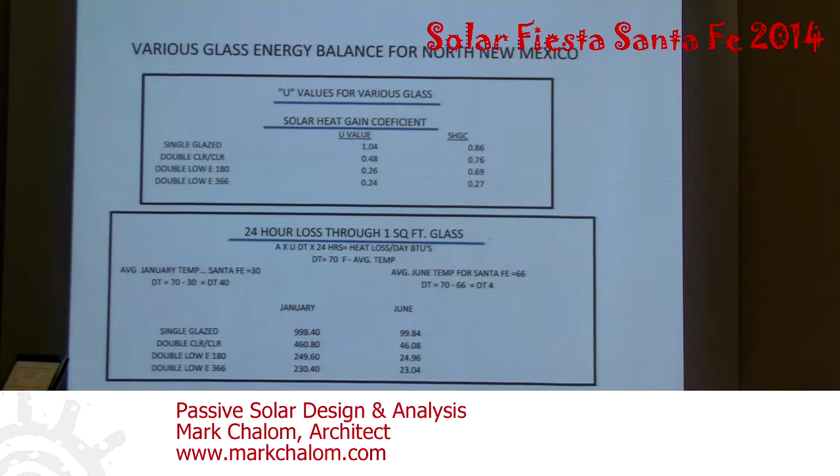A lot of people are used to seeing all kinds of pretty pictures. Well, I left those out this time, and I'm just going to talk numbers, because I think it's really important for people to understand how passive solar works and the potentials of passive solar. So let's start with a piece of glass, 1 square foot of glass, and what are its characteristics.

You have various values that you will get from the glass manufacturer, giving you the characteristics of the glass: the U value, which is the insulating value of the glass, and then your solar heat gain coefficient, which is the amount of energy that comes through the glass as a percent of the energy that strikes the glass.

So with this, I'm going to be answering the question, what kind of glass do I use for my house? I get this all the time. I'm sure a lot of you get that. And it's not a quick answer where you could just say, use this. You need to know the function of the glass, the orientation of that glass, and what you want that glass to do. So you have to do what we call an energy balance.

And part of that is comparing the gain that you get from the glass to the loss that you get through the glass. And on a 24-hour period, we used a very simple number. Here it is. Area times U, which is the insulating value, times the delta T, times 24 hours will give you the heat loss in a day in BTUs.

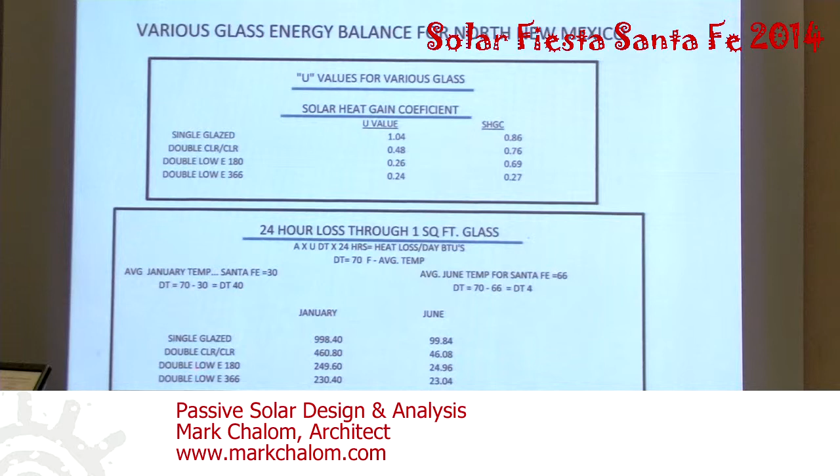So for 1 square foot of glass, understanding the loss and understanding the U value of the glass, different types of glass will have different characteristics or different loss. And this is the loss off of single glazing, double clear over clear, and 2 different types of low E, the 180 and the 366.

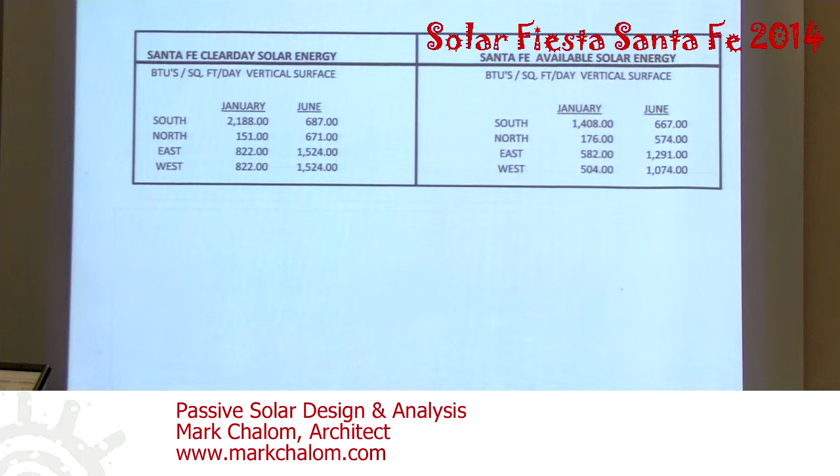Now, we also have gain on that glass, okay? We looked at the different losses. We also have different gains, which play into the percent possible sunshine, because we have clear day solar energy. This is in a perfect world on a clear January day. This is the amount of energy that is going to strike that glass on a clear January day. So different orientations, south, north, east, and west, you have different gains. And look at the gains that you get in January.

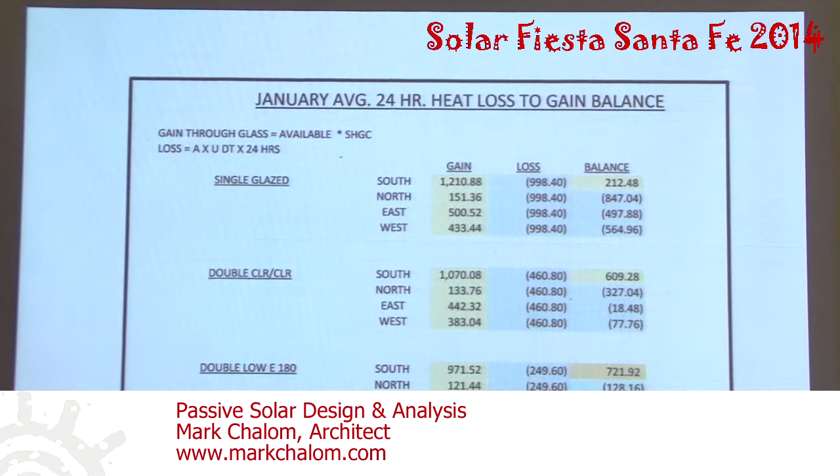But that's not what's coming in through the house. You have to degrade that number because it's not a perfect sunny day every day in January. So if you want to look at a January average, you've got to look at the average amount of gain that you get on that surface. So it degrades from 2,000 down to about 1,400, and again will drop with various types of glass or different orientations. So we now take 2188, drop it down to 1408, and then we have to run it through the solar heat gain coefficient number to find out how much energy you actually get down into the space.

So the gain has been degraded, as you see. Now we're down to 1,200 BTUs gain coming through the glass. We looked at the loss, losing 998 BTUs, so you end up with a plus here of 212 BTUs. 40 years ago, that looked pretty good to us, you know, because everybody had single glazing. Then we came out with double glazing, and we got all excited. Look at that. Almost 3 times as much energy that we're able to harvest through double glazing.

And if you take that down to low E, there are different types of low E. Low E is not always the same. Look at the difference in gain that you will get from 180 to 366. And if you look at the losses, you have more losses here than you do here. But if you look at the net difference, this low E looks a lot better than this low E. In fact, this low E has less net gain than single glazing.

So when somebody says, use low E on your south wall, your response is, what kind of low E? There's a big difference. Also look at your east and west sides. They don't gain as much, your north. And again, this is just January average. Let's look at June, because that plays into it too. What you might gain in the winter, you might lose in the summertime because the house gets too hot. So again, you have various gains and you have various losses depending on the characteristics of the glass and the orientation that that glass is facing.

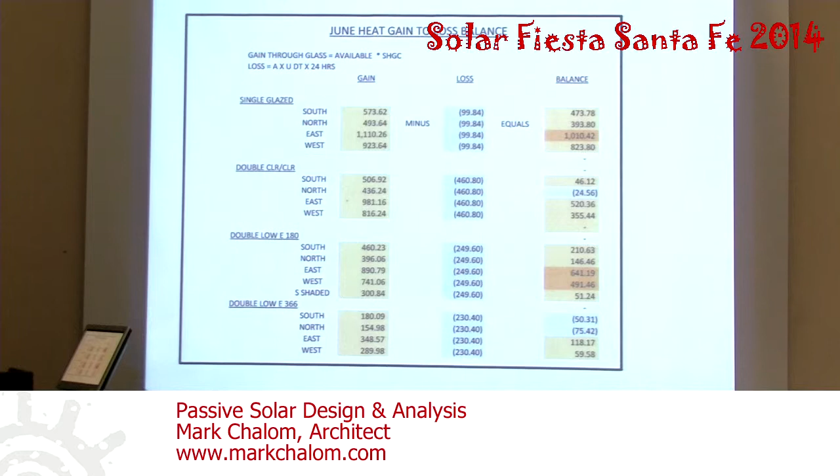So when you do the net balance, you can see that you may have a little bit of a problem here with the 180 if you have it on your east and west orientations. So you may want to go to a different low E for those orientations, or even just save yourself a little money and go up to the clear over clear. So that might help you answer, what kind of window do I want on my home?

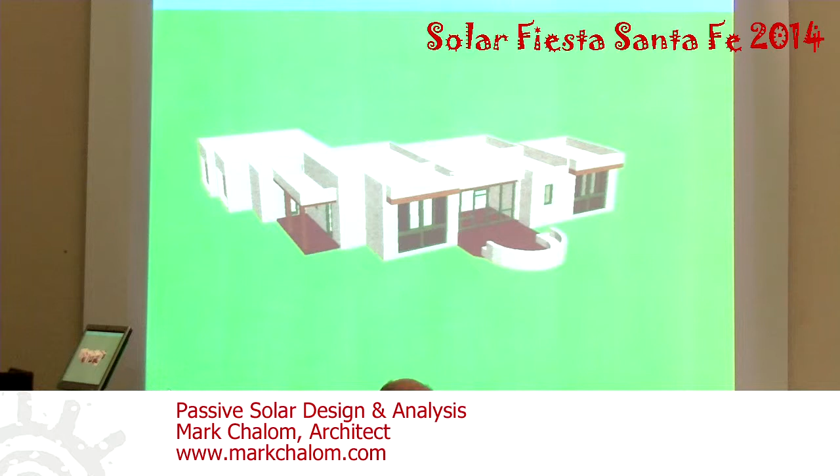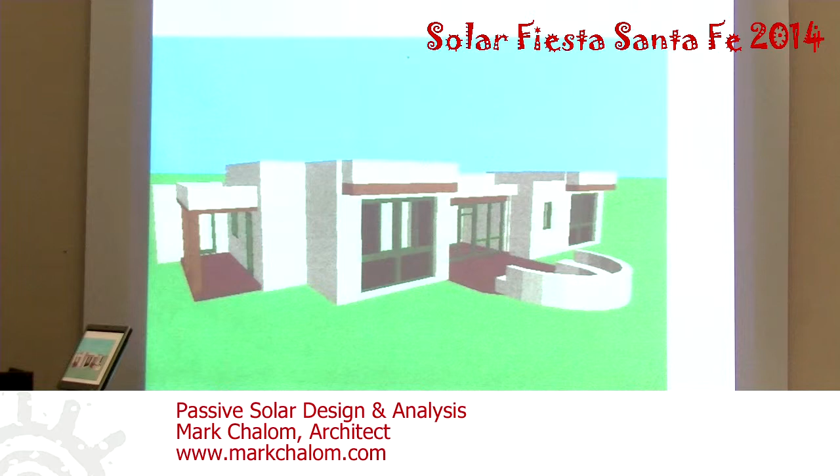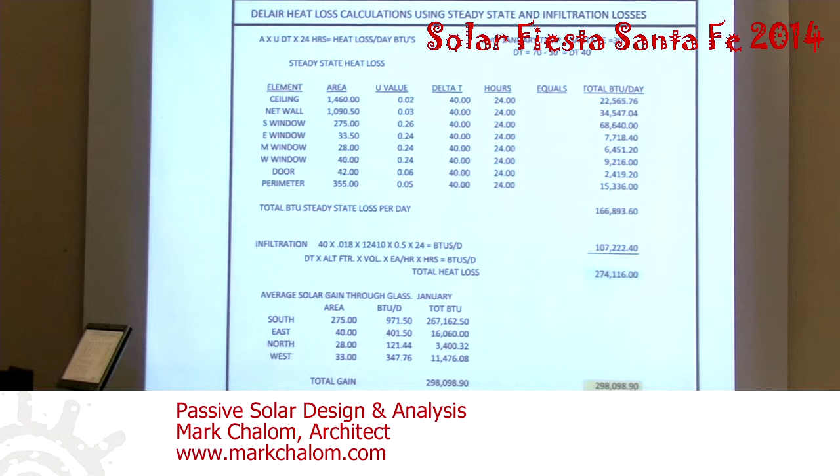This is my basic ASHRAE heat loss, heat gain calculations. This is not what I would use if I was actually engineering a passive solar home. I'd go to more sophisticated programs, but I did this because it's very simple to show you the energy balance of the home. So what we did is, again, we used that same formula, area times your U times your delta T, times 24 hours is your heat loss for the day. Again, using a 40-degree delta T. Here's my areas, my U values, my delta T's, my hours, boom, total it up. There's my steady state heat loss in BTUs for a 24-hour period.

That's not all the loss. That's just your conductive losses through the skins of the building. We also have an infiltration loss, which is the amount of energy you lose through cracks around your doors and windows, air moving across the house. You lose greatly. We're now building houses where we're getting numbers down to about a half an air exchange per hour. When Bristol and I first started cranking numbers like that, we'd fight whether it's 3 air exchanges per hour, or maybe if we built the house good, we'd call it 2 air exchanges per hour. But it was a big guess number and always debatable.

But you come up with a number, and then you add your steady state to your infiltration losses, and you come up with a total heat loss of the home. And if you see that, we're over 274,000 BTUs on a day. You can convert that by dividing it by 3,414 BTUs per kilowatt times 13 cents a kilowatt, and it'll give you about, I think it was $8 to $11 per day in there.

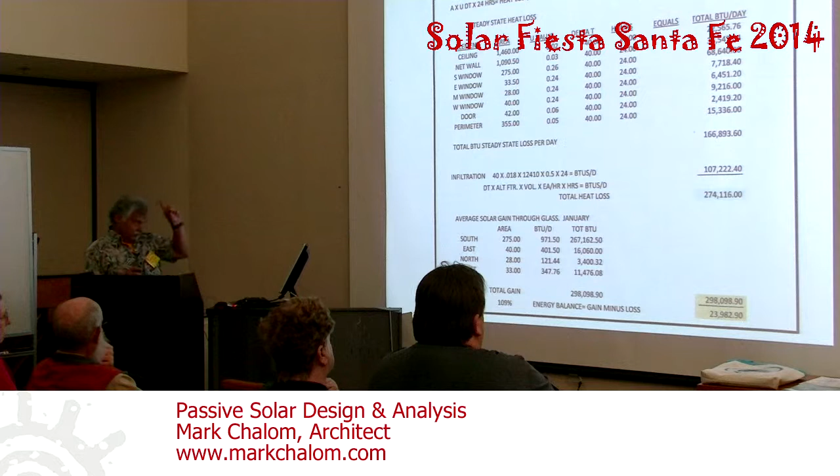No, I'll take that back. The difference will be that. I'll just keep those numbers in mind. So we have this loss of 274. So let's go ahead and take our orientations of our solar glass, 275 square feet of glass on the south, times the BTU gains that we get on an average January day through multiplying your clear day through your percent possible sunshine times your solar heat gain coefficient.

We degrade down to these numbers in BTUs per day, but you multiply it out and you get a certain amount of gain, total gain, for the house coming through your glass. So if you balance your glass gain to your loss, you end up with, in this design, a net plus of about 24,000 BTUs, which comes up to about 109% of the loss is covered by the gain. So this is a pretty good passive solar home. And it's just basically showing us the potentials that we can get through passive solar gain.

Okay, so let's take the same house and bring it down. See, I had insulating values that I use in my designs. And now we are under the new International Energy Conservation Code 2009, which has been accepted by the state of New Mexico construction industries as a standard you need to comply with to get a building permit to build your home. They want to make sure that your home is energy efficient enough. So I said, okay, let's degrade my design down to the standards of the International Energy Code,

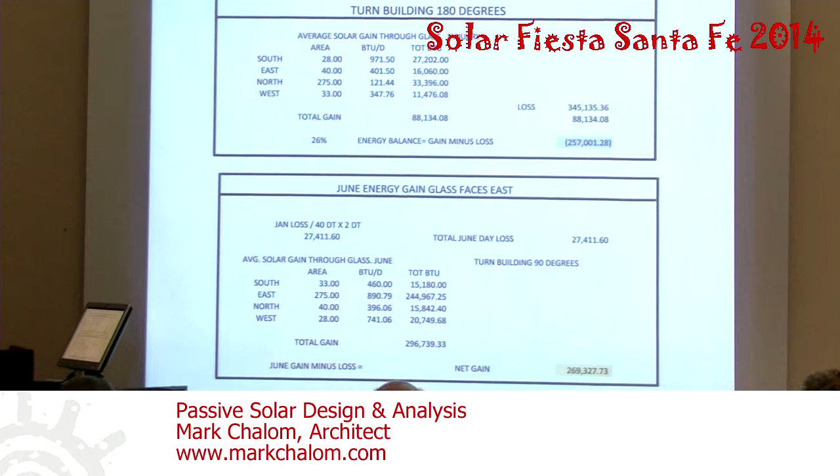But let's start playing games. Let's take this same house and turn it 180 degrees so the 275 square feet of glass is now facing the north. And we have various gains coming in. We have 28 square feet now, instead of the north, it's to the south, and 275 square feet of south is now to the north. We come up with a gain of about 88,000 BTUs compared to our loss that we had to code of 345. We end up 257,000 BTUs short of meeting our goal for a passive solar home on an average January day. So with all the glass around the house, we're taking in about 26% of the loss in solar gain.

I also wanted to take a look at June, and as I said, you've got to watch your glass in the summertime, because what you gain in the winter you might lose in the summer. And I said, okay, let's turn this house so the 275 faces east. And I don't know if you remember my chart. If you do, you're better than I. But when you look at percent of possible sunshine, you have more gain on the east than you will on the west. These numbers here.

And why is that? Because usually we have storms and stuff like that more in the afternoons than we do in the mornings in June. So you have more gain on the east than you would on the west. That's these two numbers here. So watch your east as much as you watch that western sun.

How did I go back here on this? This one? Slide. Oh, previous. Okay. Go to slide. Previous. Well, there was one right there. Previous. That one? Well, it doesn't. Yeah, go back to. Lloyd had the question. Back again. There's that previous, that second thing. Yeah. There we go. All right, Lloyd. It's okay.

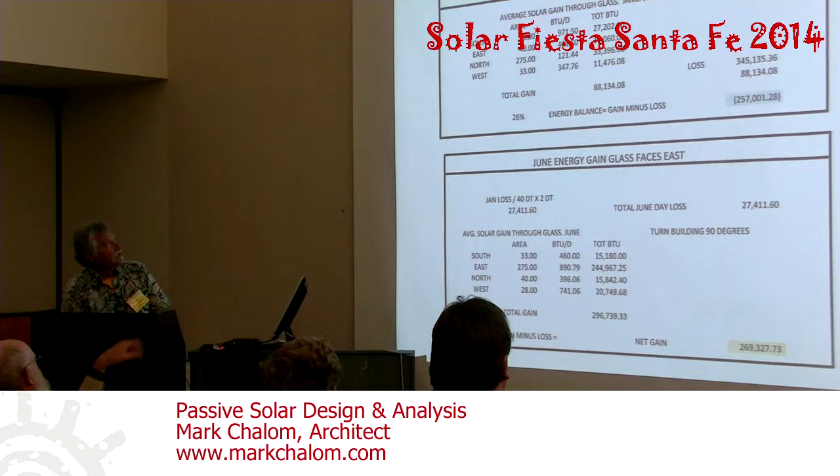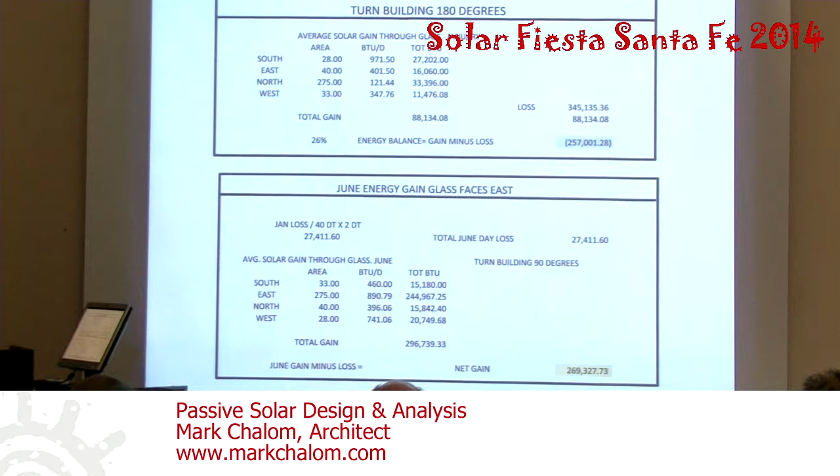You're reorienting the building. I mean, now when you're putting that glass on the north, are you using better U values than you would have had they been on the south? No, I'm just using the code approved glass. This is what we want you to use. So I just plug that in, and we come up real short when we go to the north. So you can see the difference in orientations of this home with this methodology.

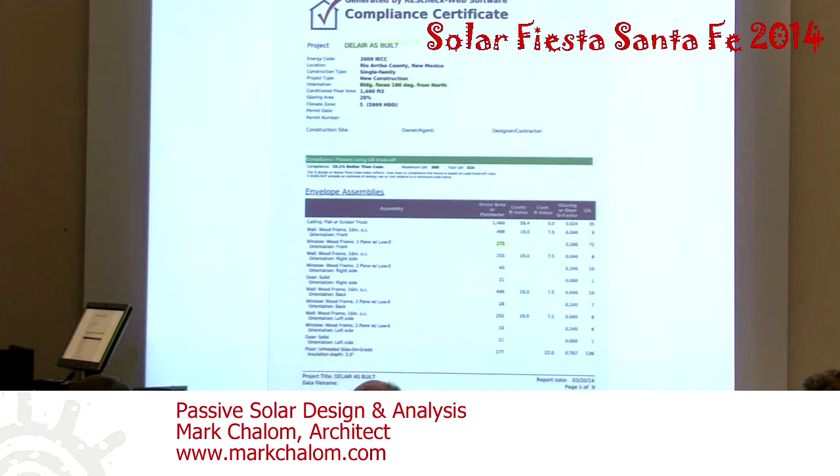Now we want to go get a building permit. We need to comply with the International Energy Conservation Code 2009. Unless you get this to pass, you will not get a building permit. And I have used this program. It's called REScheck. You can get it on the web for free, and you can fill it out and see if your house complies. And if it complies, you can go out and get your building permit.

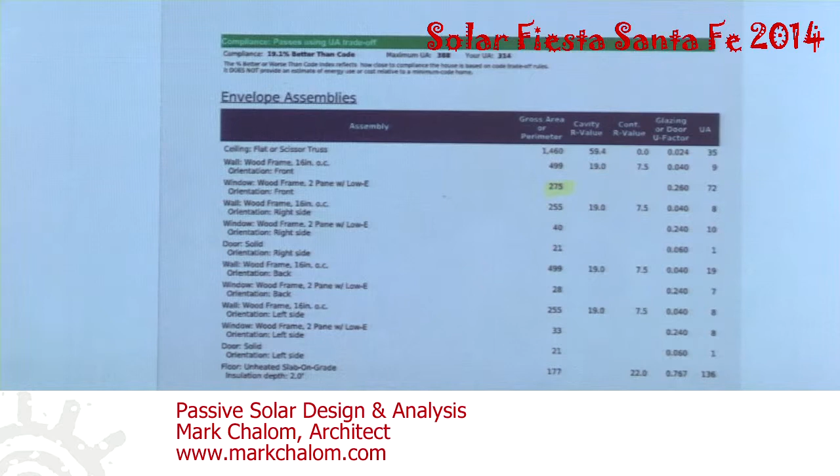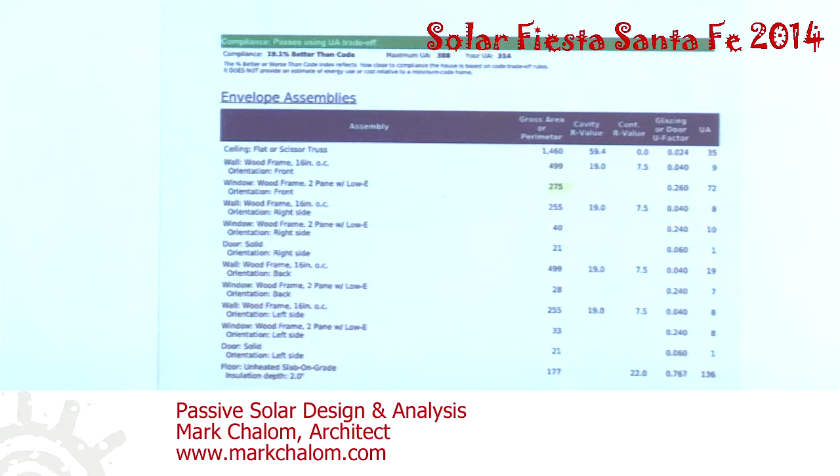So this is the first run I did with the ResCheck. I put in my areas, and I put in my insulating values, and I come up with an overall UA number. There it is up there, my UA number, area times the U value. It's a big average for the house, and that's the number they work with. And look at that. I passed by 19.1% better than code. Very nice. I'm very proud. So that's it as we built it.

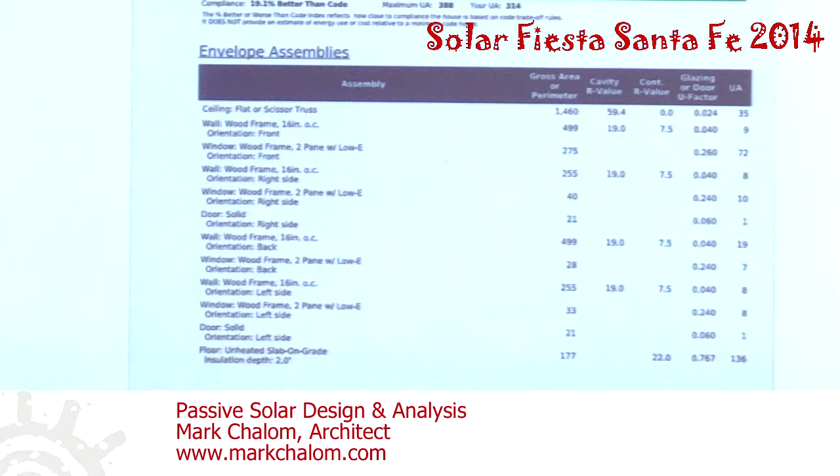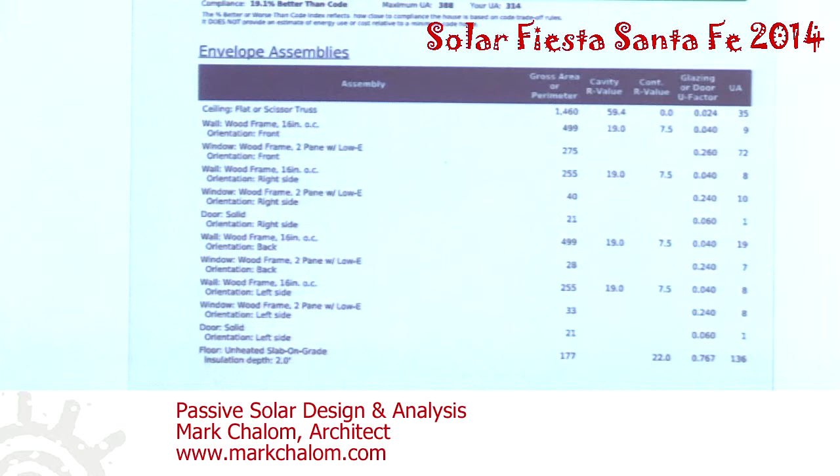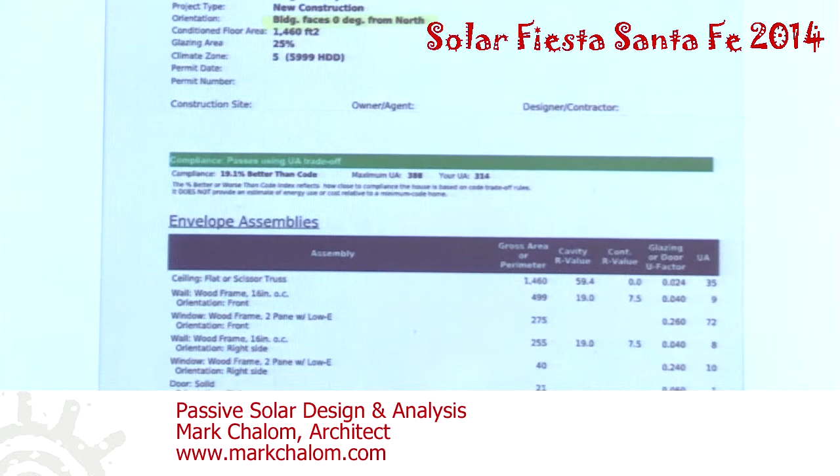Now, let's take this same building and start playing numbers. Okay? They have this thing called orientation. Building faces 0 degrees from north. And what do they mean by faces? Well, they say pick a front of the house, you give it an orientation, and then everything works off of that. So instead of giving you east and west and north, it's front, right side, back, left side. But at some point, you got to tell the front of the house faces north or south or whatever.

So I took my wonderful passive solar home, and I turned it 180 degrees so that 275 square feet faces north. And I said, what's my compliance? Look at that. I passed by 19.1%, the same number. Go build it. It's equal according to the codes. So I kind of took a little offense to that. Said, okay, let's play the game.

Let's turn the building as built back to the south, but take out all that 275 square feet of glass, okay? And just do it as a normal house and just put in 40 square feet of glass. Get rid of all this passive solar stuff and run your calculations again. What happens? 19.7% better. We get better by taking out the passive solar.

I'm sorry, I'm offended. So you're saying that's wrong, right? You're saying those numbers are wrong. Of course that's wrong. It's only looking at half the picture. It's only looking at the loss. It's not balancing it to the gain. So in their eyes, these houses are equal. Go out and build it. So, you know, I'm a little perturbed about that.

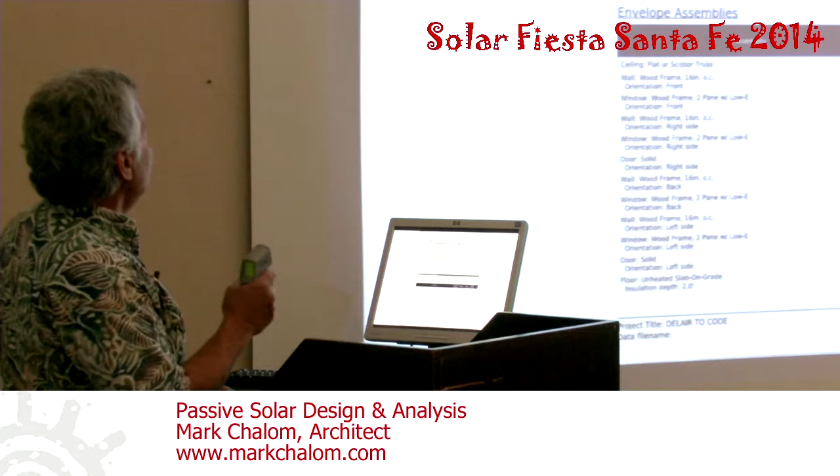And then I went ahead and I brought this house down to their code, down to their standards, not my standards, their standards. Run the calculation. This is facing south now. Run the calculation, great. 3.1% better than code. Just passed. Okay, take the same thing and turn the building 180 degrees so all the 275 square feet of glass faces north. And I said, I'm going to get clobbered. 3.1% better than code. Same number.

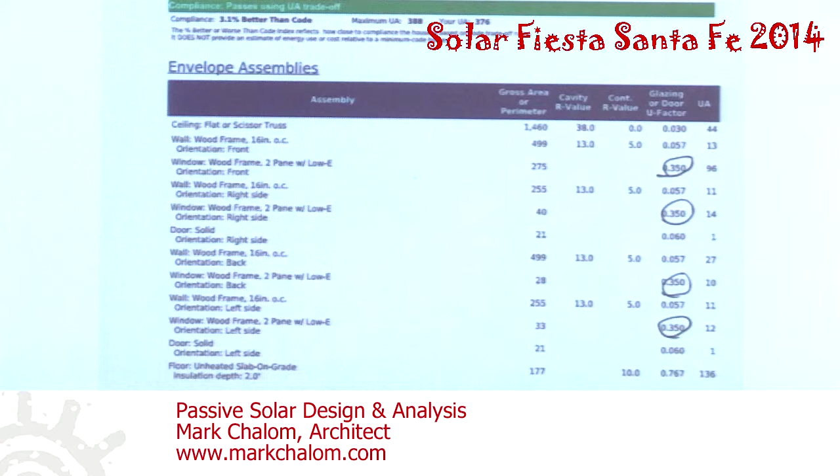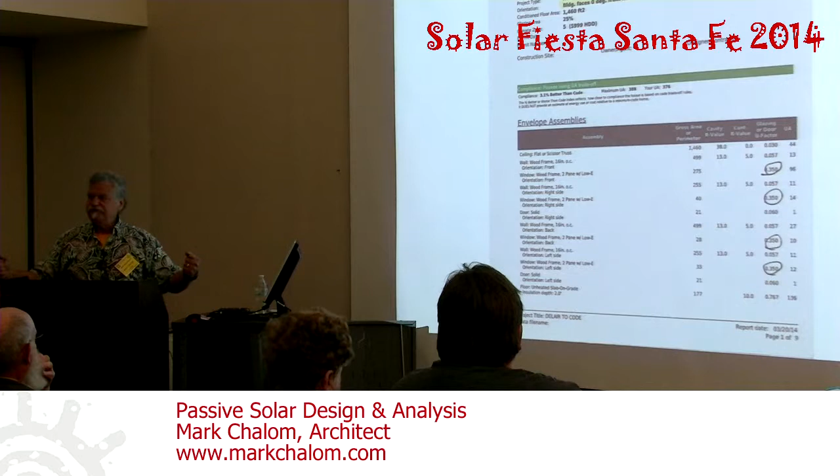Okay, so if we extrapolate the information that I've shown you, I can take out a little bit of the ceiling insulation in the house I had before and get it to where it did not pass. A nice, beautiful passive solar home, all this glass facing south. If I take a little bit of the insulation out of the ceiling, I'll get a number and it'll come up maybe 2% less than code. What do I do? Simple, take out all the solar glass. Your number will go up, you pass, you can get a building permit.

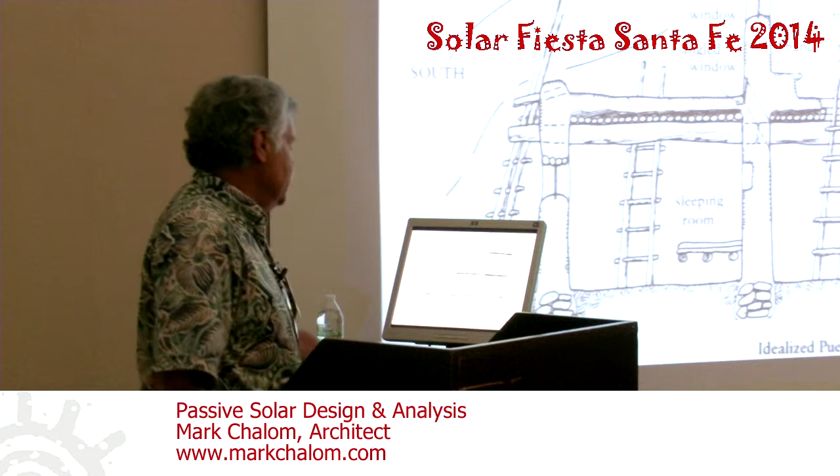This is 2014. I started doing this in 1974. And it's about time they start understanding what was known here 1,000 years ago. And understand that we don't have to build to these crazy codes, and we need to start using common sense.

But in 1974, I remember David Wright, architect, sitting with myself, Peter Van Dresser, and Bill Lumpkins, and said, we are on the verge of developing a new solar vernacular for New Mexico and the world.